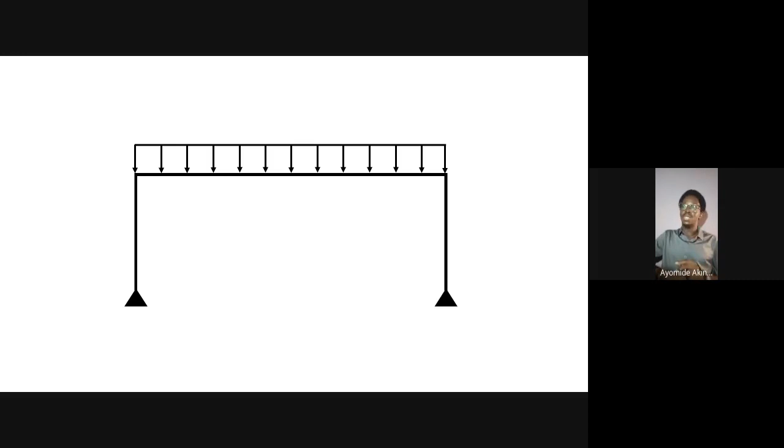All right, great. I love the honesty, right? So William said he doesn't know, and that's one of the important things about this meeting. We're breaking everything down, discretizing it, to very simple concepts. Now, all of these are textbook, right? When I mean textbook, it's easier said than done when we learn it, but applying it is a whole different game, and that's exactly what this program is about. Now, we're talking about buildings. Let's break it down, right?

Buildings are a combination of various things, right? Buildings are a combination of elements. We call them structural elements. And you can see in this diagram over here is what a lot of us actually refer to as skeleton. I don't know if many of you have heard this term before. So it's also referred to as what we call the structural frame. And the structural frame is the combination of different structural elements. Okay, and we're going to be breaking all of those down. So let's talk about these structural elements. Like I said before, if you have any questions, just let me know.

So what makes up a building structure? So this frame that we see inside here or in different buildings that we are in, what actually makes up the frame? So let's start with this. A lot of us right now are probably sitting down, standing if you are diligent. But we are probably sitting down in a building, right? A lot of us may be in a building. We may be on top of a floor, for instance, right? And that's actually part of the building, if I must say. We want to understand what the function of all of these elements are.

So let's start off with something simple. So what makes up a building structure? The first one I want to talk about now is the columns. So how many of you know what columns are? Let me see by hand again. You know what a column is, or rather, you've heard of the term. Okay, great.

So, columns in this case are vertical members through buildings, right? And we have basic classifications of columns. So for instance, we can have just decorative columns like you've seen in some of these Roman Empire prehistoric structures, right? Those very decorative columns, they just design them. Those serve as aesthetic architectural columns.

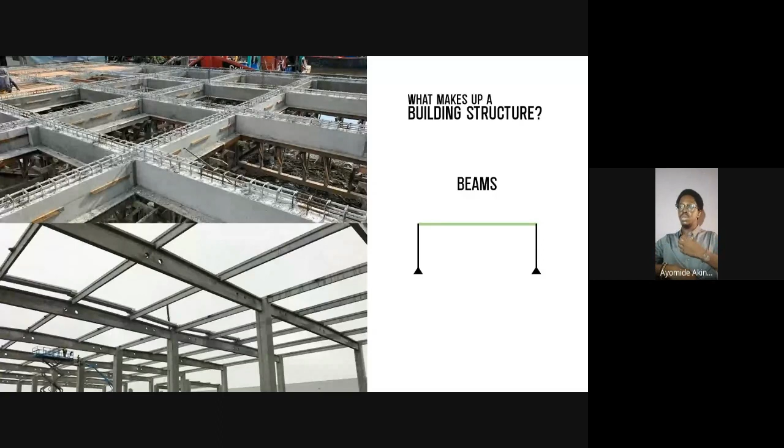The second element of the building I want to talk about now are beams. We refer to these sometimes as girders or joists, depending on the function of that particular element. So what exactly do beams do? Generally, they are referred to as horizontal structural members. Not necessarily always going to be horizontal, they could be inclined as well.

But what actually gives them the name beams is that the loads are directly imposed on them on this plane, right? So for instance, let's assume this is our beam. The loads are imposed on it in this particular direction. If the beam was inclined like this, as long as the loads are still imposed on it in this direction, it still functions as a beam. If we look at this as a member, many of us may be quick to think this is a column.

But the questions that we should be asking, for instance, is where exactly are the loads imposed on this particular structure? If they are imposed in this direction, for instance, it still functions as a beam. Now let me give a quick trivia. If, for instance, the loads are imposed on this particular element from the top, what does this make this element?

So let me just see by hands. Let me see if you can get that in the chat box. All right, so Ahmad Sabri said it functions as a column. Let me see if anybody else has any comments on that. All right, Felix said column, column. Well, great. You guys are doing great, right?

So also, depending on how that particular structural element is loaded, that's how you determine what it should be analyzed and designed as. And we'll get over to analysis and design shortly. Okay, so like I mentioned, beams are horizontal or inclined members as long as the loads are acting directly along the span. Now they can be used in foundations as well, grade beams, foundation beams, and they refer to those as elastic members.

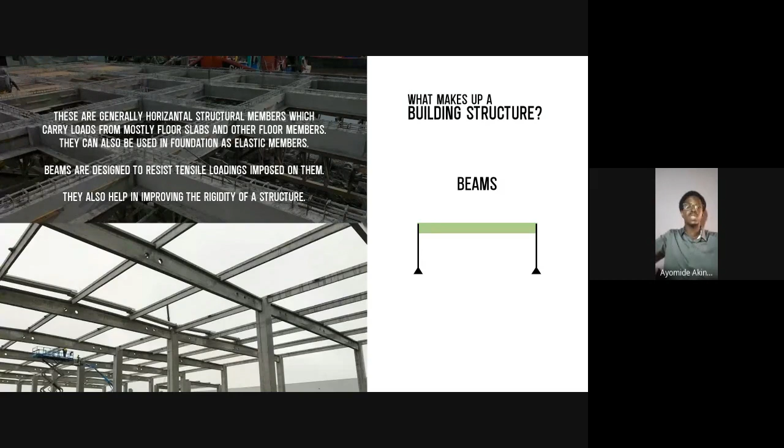Probably in your classrooms, you would have noticed a beam running through the middle of the classroom. Those beams are quite thick. The reason for that is that those beams are carrying large floor slabs, and the larger the floor slabs, the greater the loads that are going to be sent to those beams. Okay. Now we talked about slabs quite a lot. Now let's go ahead and talk about it in depth.

Floor slabs, right? So floor slabs are those panels or structural elements that we are basically always going to be interacting with on a day-to-day basis. Buildings are made up of floor slabs. Those are the actual main part of the building where we actually start to load it as human beings, or whatever the building is meant to be used for.

All right. Now, you see that they collect the majority of variable loads on the structure. So for instance, now I am sitting right here on a floor slab. If I move to the other side of the room, I've basically moved from that area and that particular region of that slab is no longer loaded, right? And that's what we call variable loads. They aren't permanent like our partition walls, for instance. So those are the block walls you see in your room, right? So that's what I mean by they carry a lot of variable loads, okay?

Now, just like beams as well, they are also designed to resist tensile loadings. So they feel most of their loadings at the bottom, for instance, right? But what distinguishes them from beams is that they have a larger area, right? And more or less, they are designed in two directions, unlike the beam where it's just designed in one direction.

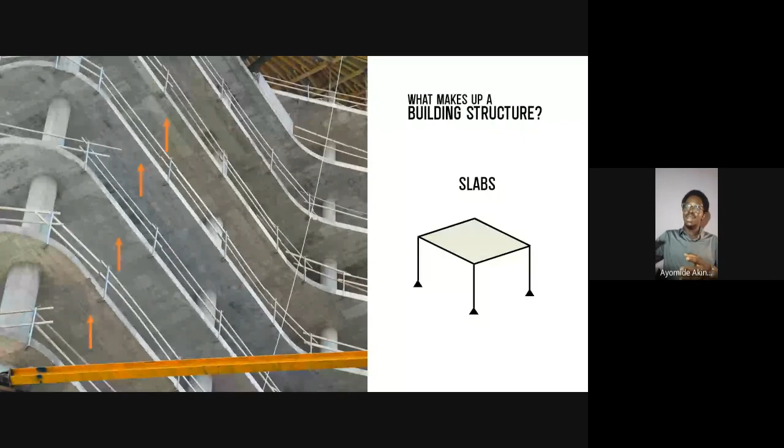So the kind of system where we have, let me move this to this next picture, the loads of the slabs going directly to the columns is what we call a flat slab system, right? I don't know if any of you have heard of solid slab systems, waffle slab systems, ribbed slab systems, flat slab systems, right? So those are what we call structural configurations. The cases where we use flat slabs is probably where we want to have larger spans or we don't want to have those suspended beams showing in the rooms, right?

So buildings could be designed to have the loads of the slab go directly to the columns. But one of the things that you notice ahead of time is that those columns are always going to have a larger cross-section area, right? And also you notice that in some cases where the slab spans are quite large, the thickness of the slabs increases.

All right, so I saw a beautiful question. I think I missed that, but let me go back to it. Amatabi said, could you explain the difference between the various types of slabs? Okay, great. So that's basically what I'm doing right now. So for flat slabs, the loads from the slab go directly to the columns and they have larger spans. One thing that you also notice about them is that they have a significantly larger thickness or structural depth.

For the solid slab systems, those types of slabs are carried by beams. So the loading from the slabs is connected to the beams, right? And then from the beams, those loads go directly to the columns. And that's one that we're actually quite familiar with. Probably you see that in your dorm room, for instance, or in smaller buildings like residential buildings, okay?

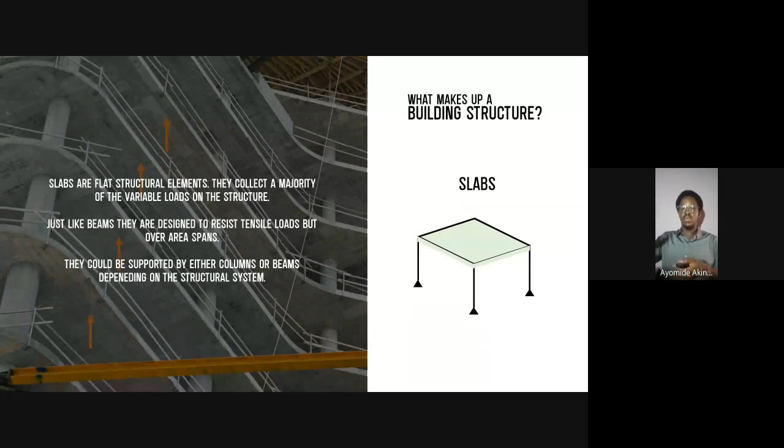So I put in an illustration, for instance, where the loading on the slab increases, right? And as a designer, you notice that particular slab is failing. What we as structural engineers tend to do is increase the thickness of the slab, right? To make it perform or function as exactly what it was loaded to do. Okay. Now, going on here, we now talk about walls.

All right, so let me stop here because these particular elements are not quite common. But how many of us are familiar with structural walls? Not your normal architectural walls, but how many of you have come across structural walls before? Okay, all right. So Duncan, okay, great. So Felix, all right, great. So you guys are familiar with structural walls.

So what distinguishes a structural wall, for instance, from a normal architectural wall? Okay, so structural walls are also panels just like slabs, but in this case, they actually do the same role as columns, right?

So let me see. I've got quite a lot of items on my table. Let me see if I can get a cleaner element I can use. All right, so I have my Bible over here, right? So let's assume this is a wall, right?

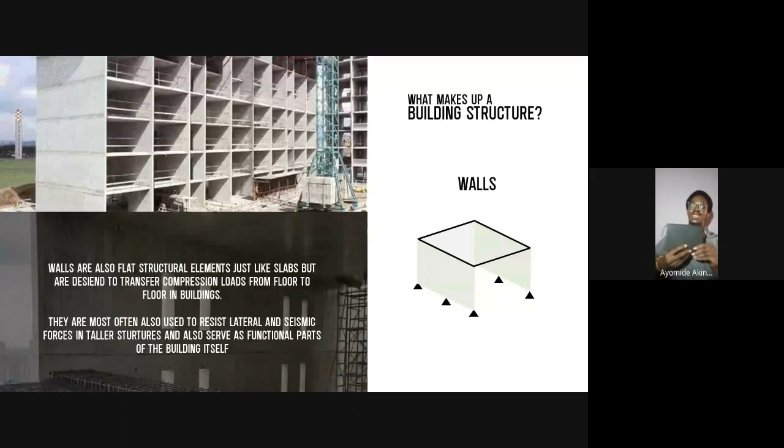Okay, great. So these walls tend to be structural. That means they actually carry loads. For you to determine a particular element is a structural element, it is carrying loads from the structure. In the case of walls, the loads are going directly to the top of the elements, just like beams. But what distinguishes it from beams is that beams are just suspended elements. Walls go down just like columns.

So those internal forces flow through the wall, and then they go straight down to the foundations, just like columns as well. So that is how you distinguish structural walls. Now, if the structural wall was a concrete element, you will notice that those walls are always going to be reinforced, right? They will have steel embedded inside them, just like your other concrete elements. I'll talk about those materials.

And also, for taller structures, we use structural walls to resist seismic and wind lateral loadings on buildings, right? So they have those functions as well to reduce lateral drift. If you notice in countries that have high risk of seismic activity, taller structures tend to be built with core walls or shear walls at the edges, right? Those help to reduce what we call lateral drifting, the building collapsing as it's shaking. Okay, so that is one of the functions as well.

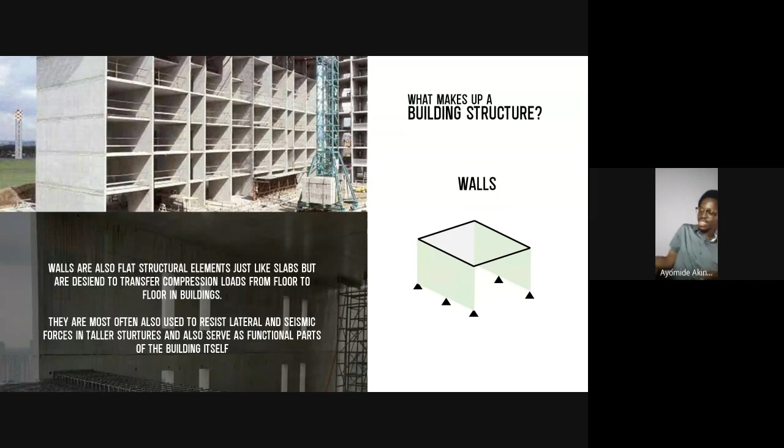Okay. All right. So yeah. All right. Great. Happy to explain that. All right, good. All right, great.

Foundations, right? So every single element that I talked about earlier on are what we call superstructural elements, apart from the ground beams that I made emphasis on earlier. So superstructural elements include columns. They could include your suspended beams. They could include your suspended floors as well. All of those loads are now transferred to the ground.

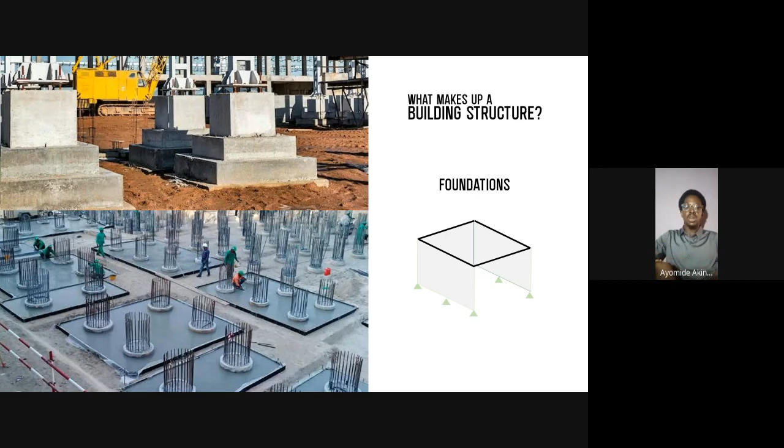So like I mentioned earlier, every single thing is subjected to the force of gravity. Everything must go down, okay? Now, foundations help to transfer those loadings coming from the superstructure all the way to the ground. And depending on some factors such as loadings, environmental factors, as well as the nature of the existing ground, it will determine the type of foundation that you use.

So let me do a quick stop and ask, how many of you are familiar with foundations? You can mention an example of a foundation type that you've probably seen before or you've learned about. So let me get that in the chat box. If you are familiar with a foundation type, let me see your responses in the chat box. Okay. All right, good. So I'll wait for that.

So like I mentioned, foundations are elements that actually take all the loadings from the superstructure, and they are basically referred to as what we call substructural elements. So we have various types of foundation. I haven't gotten any comments about foundation types, so probably because of time, let me move on. So we have different types of foundations. Okay, great. I think maybe that was a lag on my end.

All right, so we have shallow foundations. So that's the classification of foundations. Under shallow foundations, we could have, for instance, pad footings. We could have raft footings. Okay, so Victor said raft footings. Great. So if it's not a shallow foundation, it's most likely the other classification, which is a deep foundation. We could have piles, bored or drilled piles, which go straight down into the soil strata, into deeper depth.

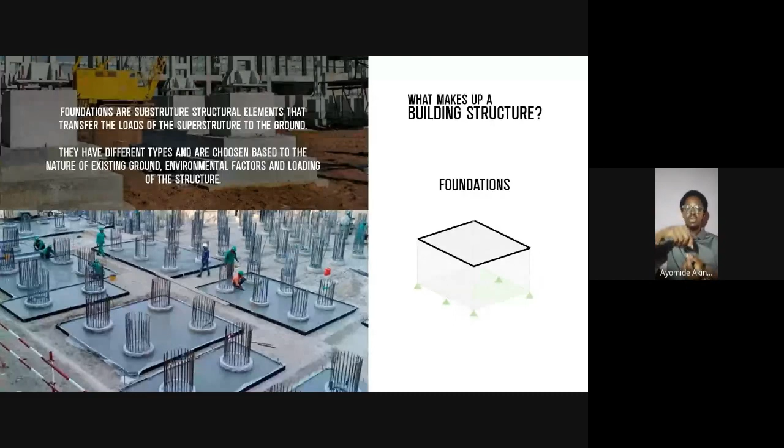Okay. All right. So that's basically how to also distinguish that. All right, so moving on, we also have what we call structural frames. So do not confuse it with structural configuration. Configuration means how the building, for instance, decomposes loads. So configurations such as solid slabs, where the slab loads go from the slab to the beams to the columns, or flat slabs in the case where it goes from the slabs directly to the columns.

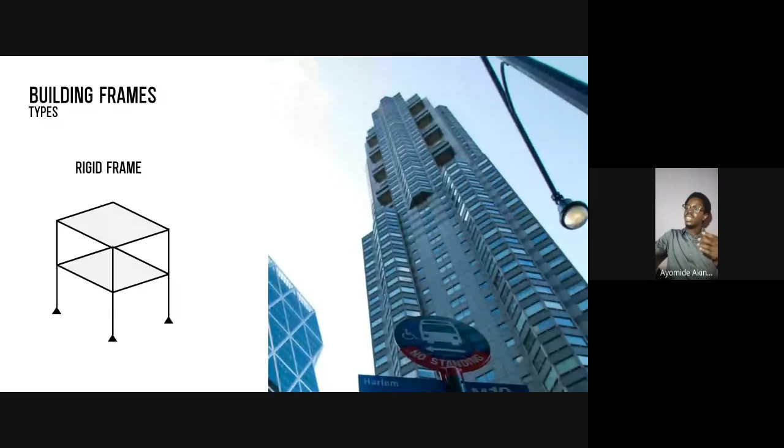But when we start to have what we call bracing, we now determine that that particular building frame has turned into what we call a braced frame structure, meaning that that particular system is going to be a lot stiffer. And I mentioned stiffness earlier on. So for instance, introducing beams at particular floors will make the building a lot stiffer in some areas.

Now, we don't necessarily always have to do that on the horizontal plane. You can also do that in the vertical or inclined plane as well, right? And that's one of the beauties of structural engineering, because by modeling and trying out some of these options, we can see what makes a building stand better depending on the type of loading that we are applying to it. Okay, great. So that's just a quick demonstration on building frames.

All right, good. So before I continue, if you do have any questions, do let me know as well. And just as we continue, I'm going to be talking about materials, right? So Kenyatta students, I want to ask, what is the most common building material in your country or in your particular area? Okay, I see a hand from Ahmad.

Yeah, that will be reinforced concrete. We haven't done much on structural timber. I heard it's happening in Uganda, but it's something that is yet to happen in Kenya. Mm, structural timber, that's sustainable, but mainly it's reinforced concrete, okay. And steel. All right, so reinforced concrete and structural steel.

Okay, great. So let me see, do I have any other hand as well? What is the common building material in your country? A lot of us are from Kenya as well. So let's see. I see from Muyazi, they said concrete as well. Okay, great. So materials used in construction, or rather, what are considered for design?

Someone didn't just wake up one morning and say, let's start building with concrete, right? There are actually some factors that go into the choice of building materials. So for instance, if you look into the western part of the world, so that's America, you will notice that there's a very common building material which is used for mostly residential buildings.

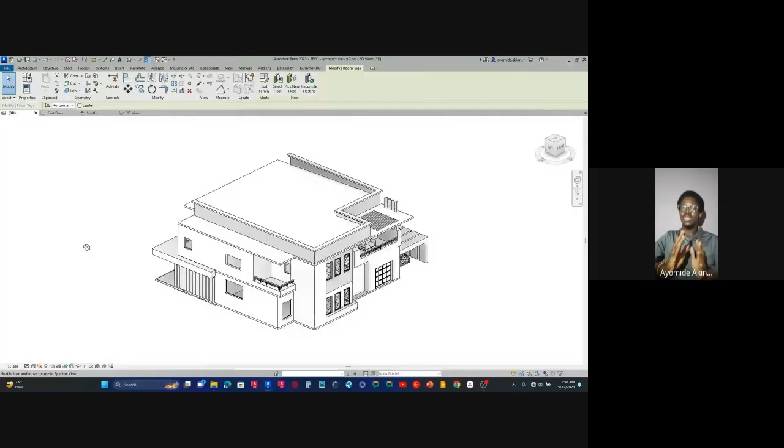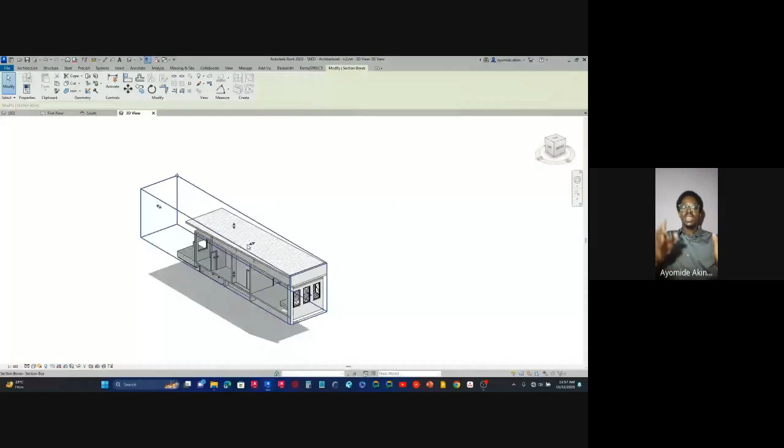All right, good. So now I've talked about some of the basics of structural design. If we have those foundational concepts, we know what type of material to use, we know the structural configuration, we know what the building elements are, such as the columns, the beams, the slabs, trusses, and all of that. How do we use all that information to design a building? I am the structural engineer and I have to determine where a structural element can be in a building. But I can't determine all these things without having what we call a referencing document.

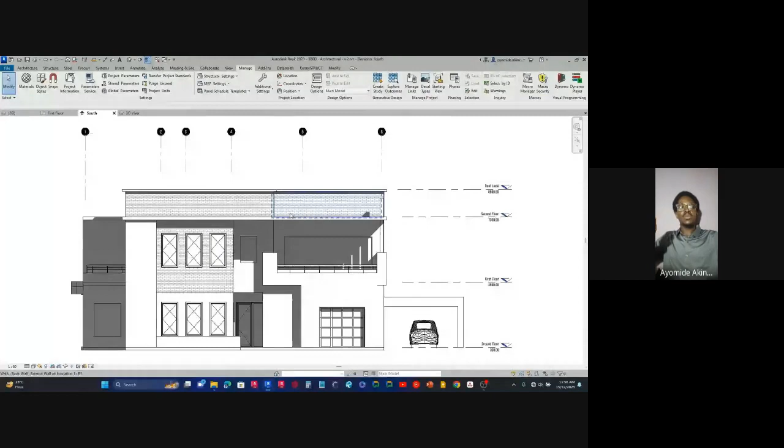So our first point of contact is to reach out to an architect. These are the professionals that are responsible for designing buildings in general. So we get consulted by an architect, or if you are working in a big firm, you collaborate with your architects and look at your design. Oh, this is really good. Always compliment the architects, by the way. That's good advice. And you look at the structure.

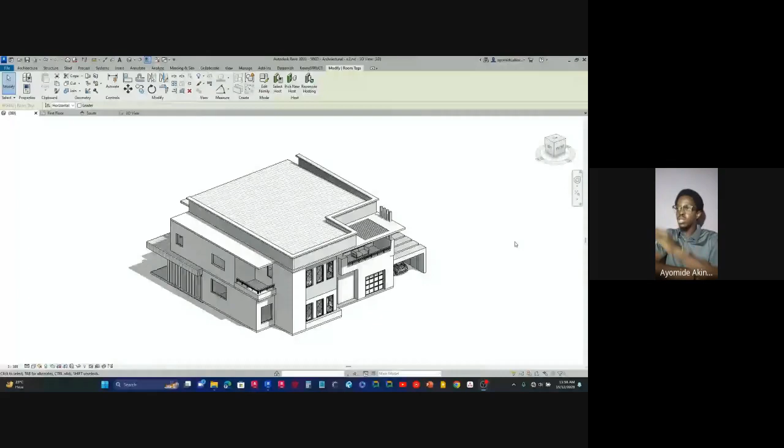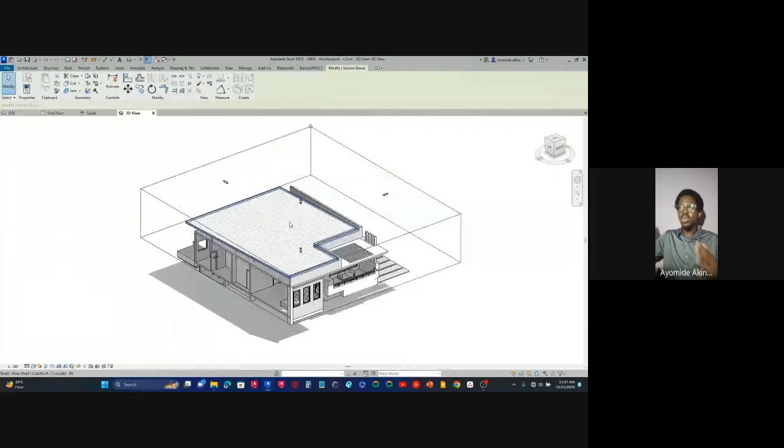Now, whatever is in the architectural drawing is not enough for the building to stand. We come in and say, okay, this is what we can do, this is where we can place structural elements. But this requires us to sit down and look through those documents. So if we're looking through 2D plans, printed drawings, PDFs, or BIM models, we want to look at areas that will be most exposed to loadings, areas that may prove problematic, areas that will call for concern, probably for rework or redesign. So we want to spend a lot of time looking through all these elements and making sure that this can actually work.

And you would have probably heard this before. I don't know how many of you have heard this in the industry; probably some of you have. The architect's dream is an engineer's nightmare.

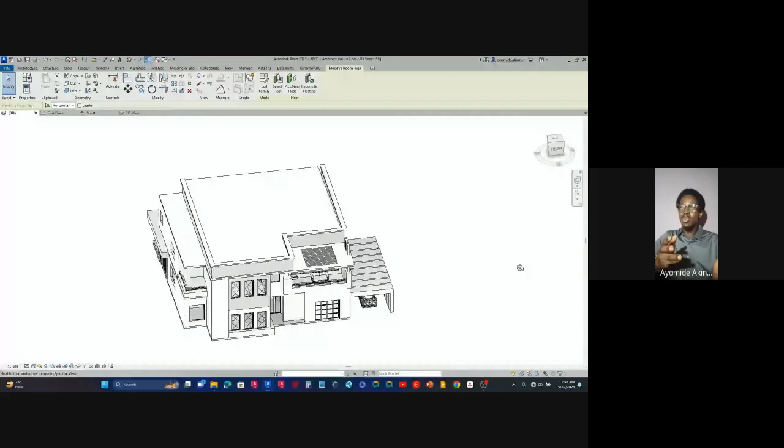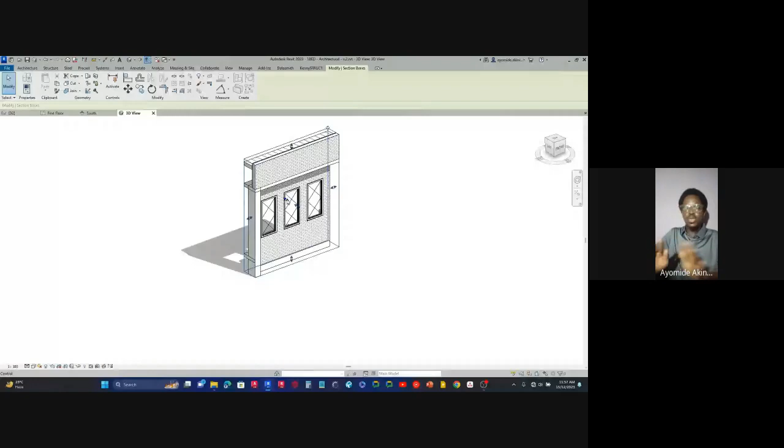Now it is our job to be challenged by the architect, his ideas, and then bring all of that together and say, okay, can we make this work? If it can't work, are there any other suggestions, right? So all of this, we take our time and look through the model. For instance, the arrangement of walls, the arrangement of floors, the levels, the height to height of floors. We look at all of this.

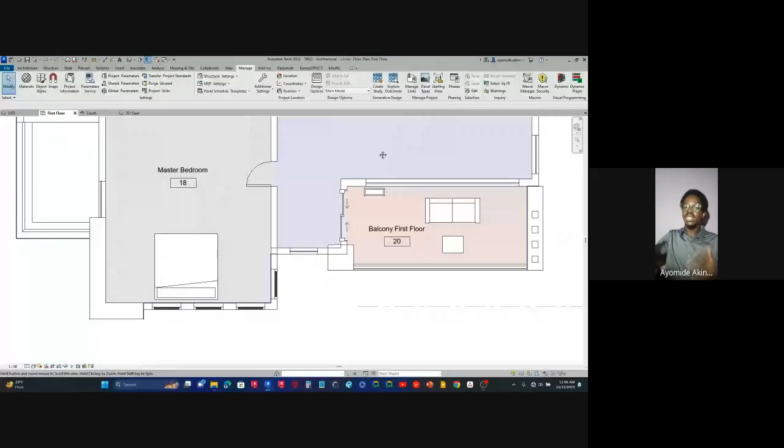I'm actually spending a lot of time there because as structural engineers, or probably project engineers as well, you really want to take a lot of time reviewing the architectural drawing before making decisions as you prepare for your structural design. Now, with that being said, we now go ahead and do what we call the arrangement of structural elements. As you can see in this visual demonstration, all of these elements have been hidden inside the building to make sure that they don't defeat the function of the structure.

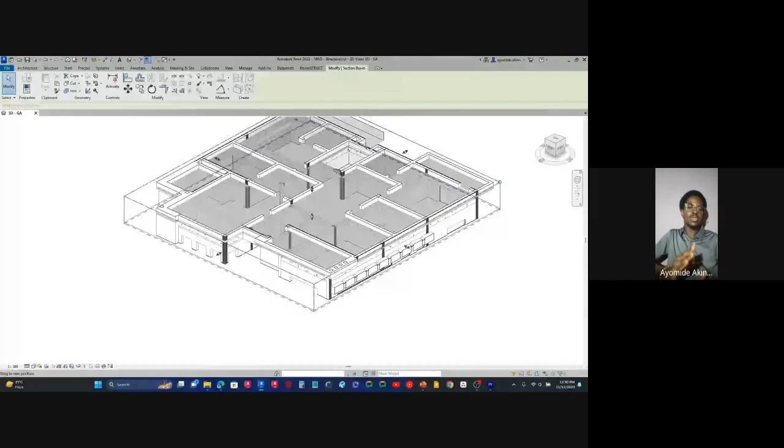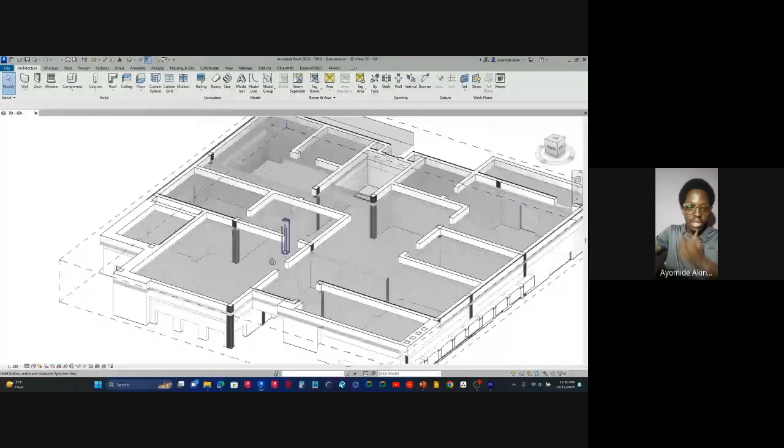Now, who can give me a reason why we have to hide these elements in the building? Probably by hands, or you could also mention in the chat box. So why do we hide our structural elements in the building? Let me just see if anybody gets that. All right, great. I see a comment from Jim. Jim is saying aesthetic, so probably referring to not defeating the aesthetic function of the building. So the beauty, right?

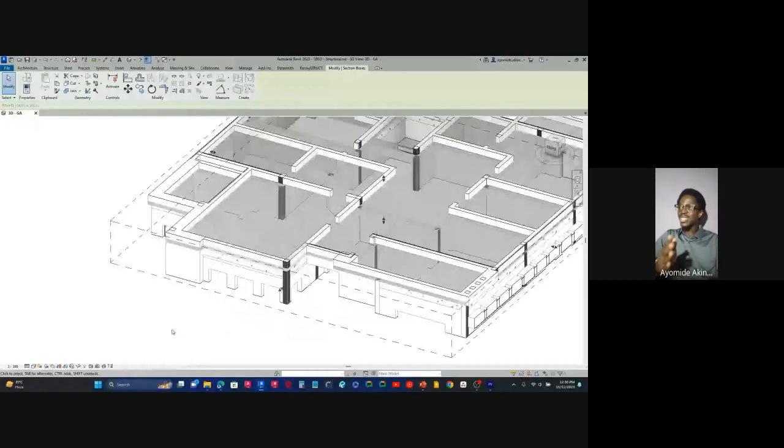Yeah, great, beauty. It won't be nice, for instance, if you are sitting in the living room watching TV and there's a column standing in front of you. Unless you are a hardcore structural engineer, you don't really want to see that, right? Like I mentioned earlier, the structural frame is the skeleton of the building. You don't walk on the road and expect people to see your skeleton. That's quite wrong and very disturbing, if I must say. We want to make sure that whatever is making the building stand is protected by the building core.

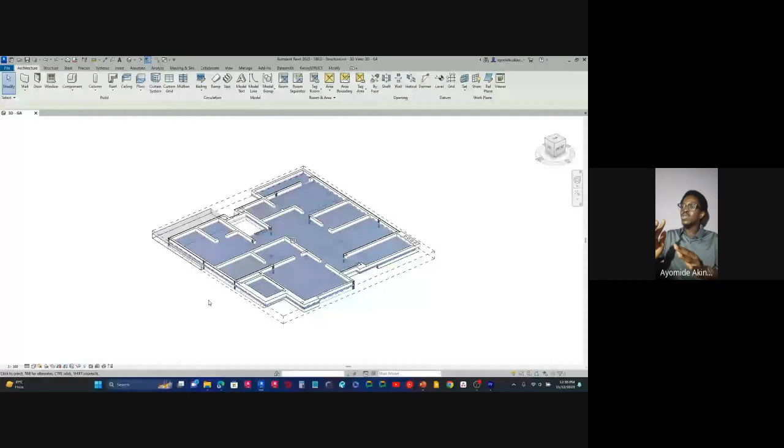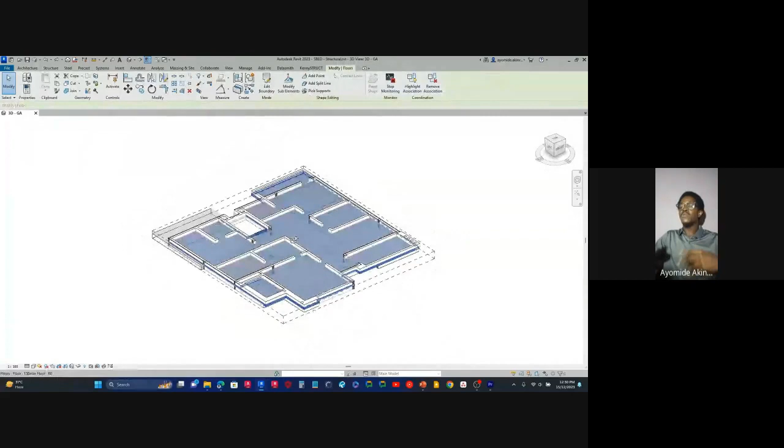So we now arrange these elements based on experience. And I mention experience, very important: based on experience, you arrange them in a way that you feel will work. Now, this is kind of an advice, especially for young designers. You don't necessarily always have to master the placement of elements. You place them in a way that you feel will work, and then you go over to analysis, which I'll talk about very shortly, and determine, okay, probably I can move this beam here, I can move this column here, and then see how it works.

All right, so now we've arranged the structural elements. We now go over here to analysis. Before I continue, let me ask: how many of you enjoyed structural analysis in school? I believe you should probably start structural analysis in your third year. All right. Okay, so if you do, it's probably the same thing as well.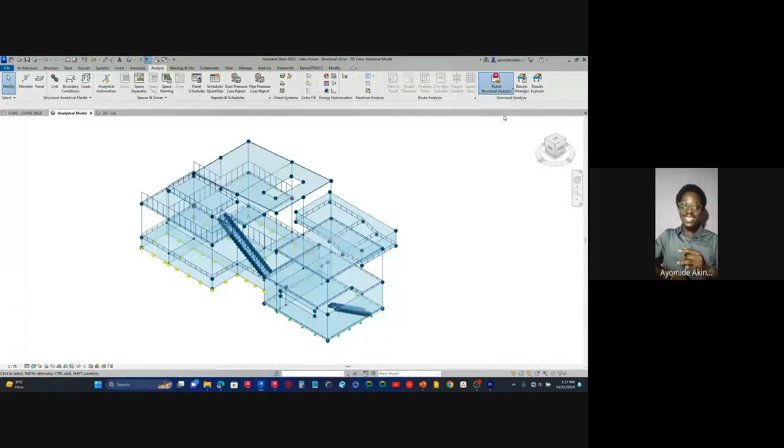All right. So Ahmad has a hand. Okay. All right. Yeah, just a comment. We're going to start structural analysis in our fourth year. So as with me, I'm going to start it in May, and if we have fourth years here, they've already done it. I'm going to do it in May. But this is very interesting so far. Okay, all right, great.

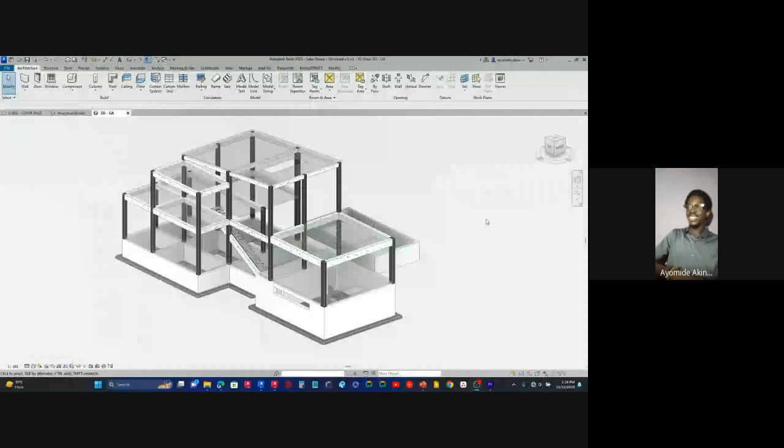All right, so structural analysis. Yeah, it's very important. And the reason why I mention this is that in most schools, I'm not sure if it's the same in Kenya, we tend to learn how to do structural analysis before design, which is actually the proper order of things. But, like for instance, you saw in the earlier presentation where you have those line diagrams. We are just seeing all of that and we don't know exactly what it means.

Okay, I think I have a hand from Ahmad.

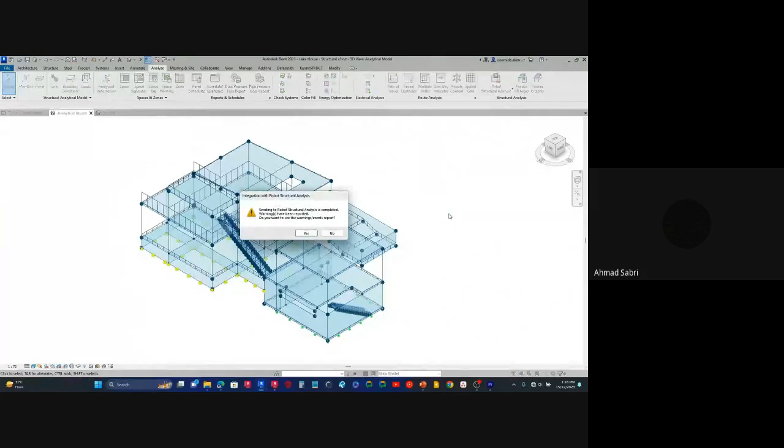Apologies, I think I meant to say we're going to do design in fourth year. And yeah, structural analysis, we've been doing it since second year. Okay, all right, in second year. Okay, great. Because I know it should be the first, order of things, right? So we see all these line diagrams, these confusing frames and all of that. And what exactly do they mean?

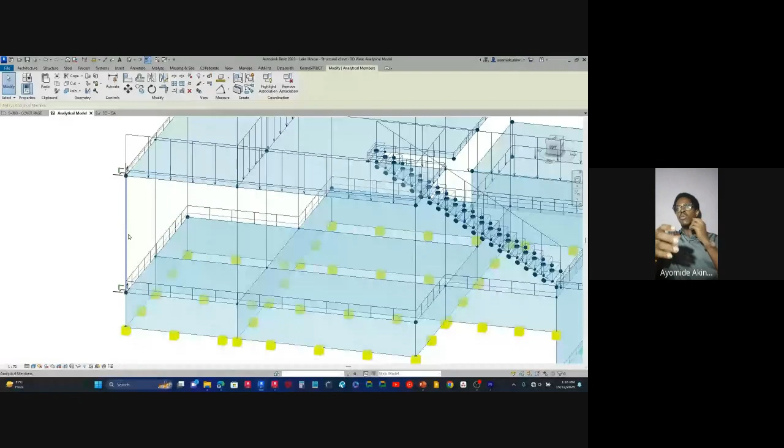Those are what we call representation of those structural elements. So like you saw earlier, for instance, a line connected to two triangles, right? These are what we call representation of your structural elements. And what we do is that we add loadings, like you saw those arrow diagrams earlier on in the presentation. We load them and then we analyze them to see how they react under those types of loads.

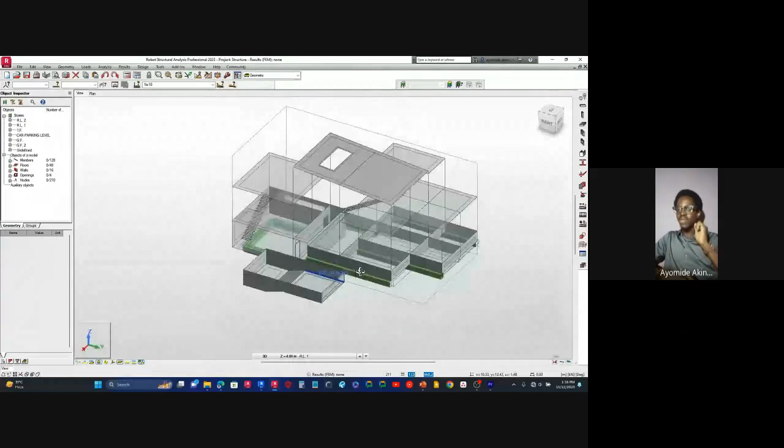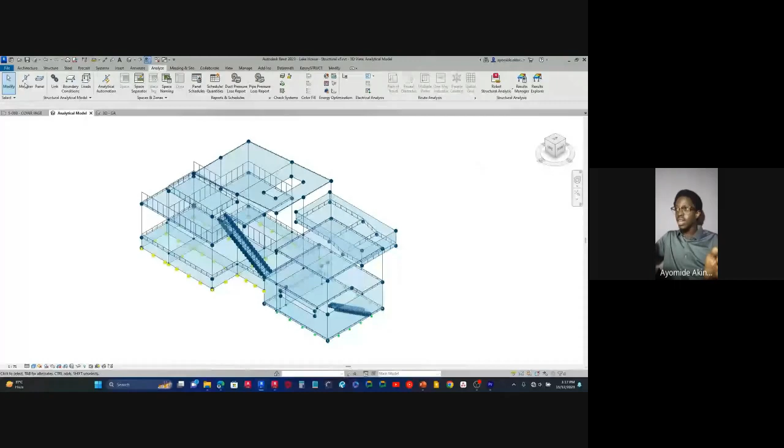Structural analysis is a very core part of structural engineering because it is where we get to determine, for instance, how a particular element should be designed, or what are the things that we need to look out for when we're designing the element. Is it going to be bending? Is it going to be torsion? Is it going to be shear? All of those things are very, very vital. And it's something that you would not necessarily always enjoy when you start, but once you see the practical aspects of it, it becomes the full beauty.

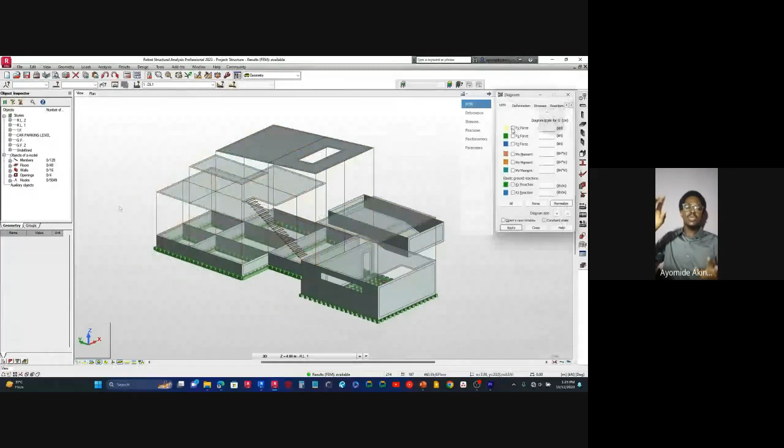Let me skip this here. This is probably what I can show you, for instance. You load the structure, you do your analysis using software or through manual design, and then you can look at your elements and see what forces they are subjected to based on how you loaded the structure. We can look at the bending, we can look at the axial forces. These are things that you can't see with your eyes, but these diagrams show you exactly what is happening in that element. And all of these values are what you consider when you start doing your design.

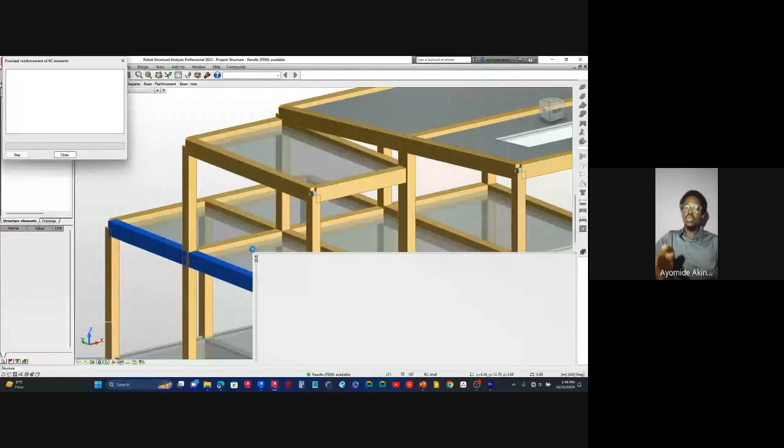So a good encouragement, trust me, structural analysis is very beautiful once you get the hang of it and you can apply it. Now, when you've analyzed your structure, it doesn't stop there. You're just beginning. You go ahead and prep for your design. You are considering those values as well as some other preliminary values. As a structural engineer you make a lot of assumptions, and this can be based on your experience, what you've been exposed to, or the preliminary data that has been given to you. So if you have a beam, you have some information about its cross-section area, you know what has been loaded, you know its values.

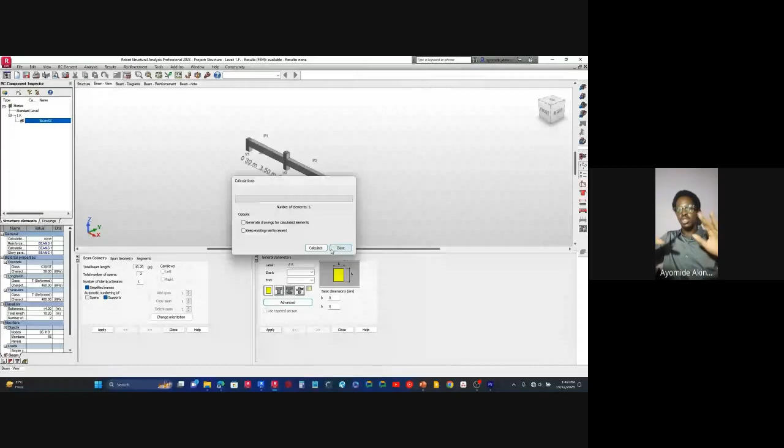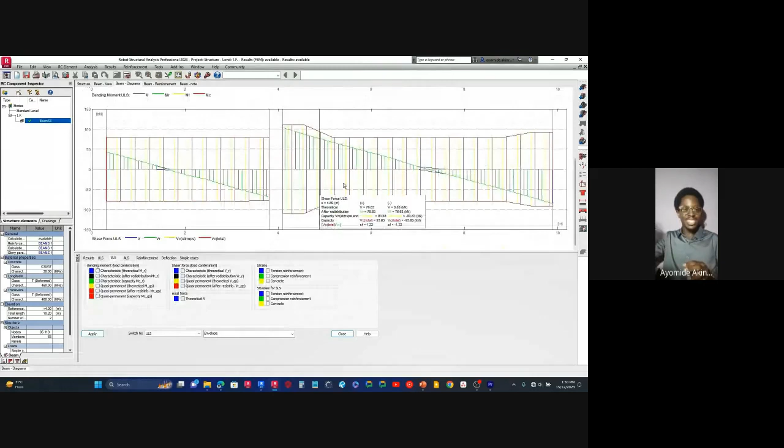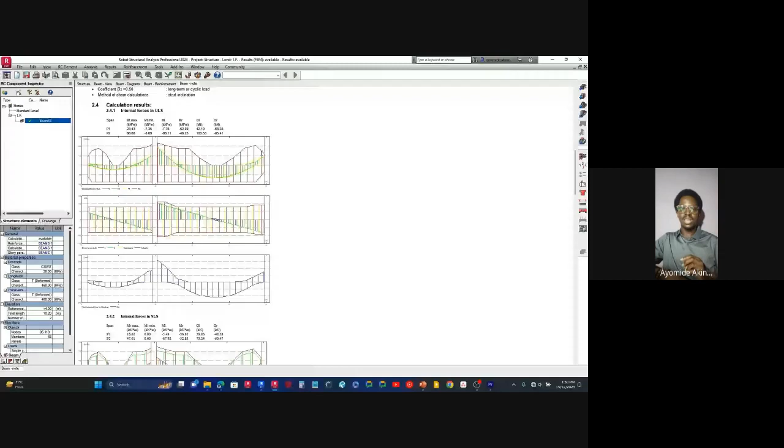Now, aside from all that geometric information and preliminary data, we have to choose a code. How many of you are familiar with design codes? Please don't pay attention to this slide for now, it's going to be on repeat. So how many of you are familiar with design codes? That's structural design, building design codes. Let me see hands. All right, so Felix has a hand. Okay, Duncan has a hand. Okay, great. Let me simplify it like this.

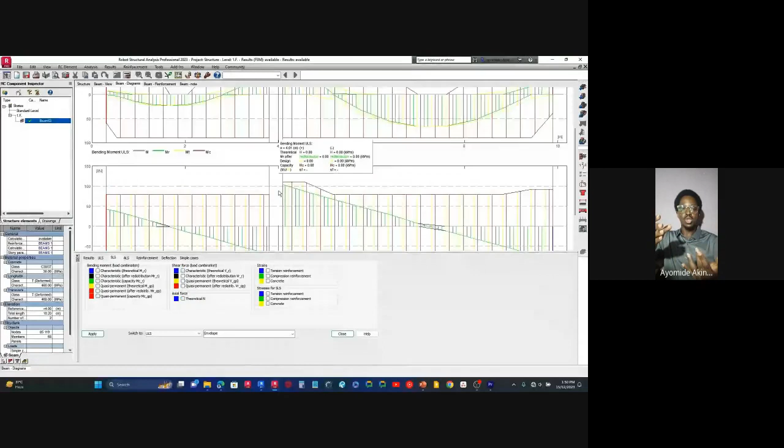We can't leave human beings to determine how structures should be designed, especially contractors. People will get away with a lot of things. If you get to a construction site as a project engineer, and the drawing says there should be three numbers of 16 members placed at the bottom of the beam, and another engineer walks in and says no, place two numbers of 16 members at the bottom of the beam, there's going to be quite a lot of confusion. What determines the number of bars in a reinforced concrete element is what we call a building design code. They have laid out instructions. I refer to it like a rule book.

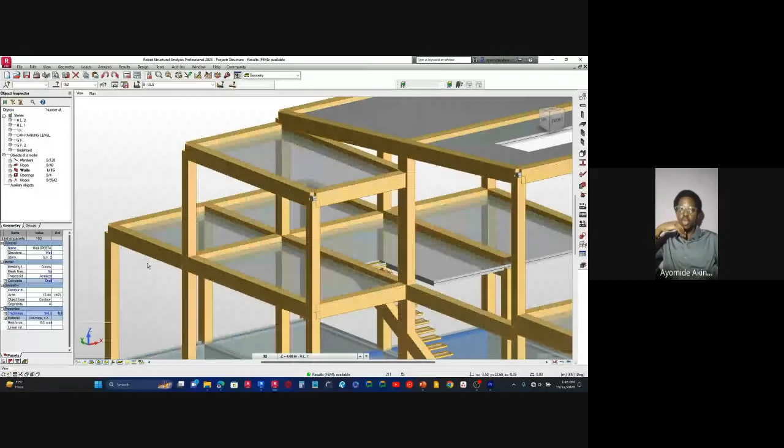A constitution for structural engineers to follow to determine how a particular element should be designed, right? So not everybody will just have their own idea on how an element should work. So all of these have been researched, and then they've been published for us structural engineers to use for the design of our elements. So we use all of that information to perform the design of some structural elements such as our beams, as you can see in this demonstration.

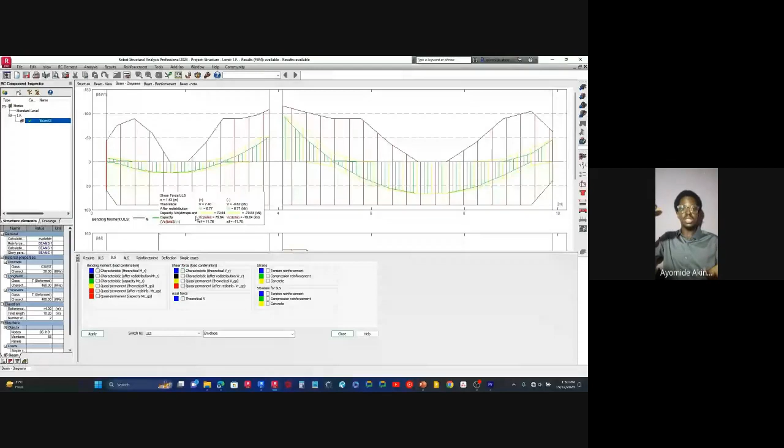And there's quite a lot of inputs that go into it. So for instance, you are going to specify the cover, you're going to specify the material, what type of concrete material you are going to use if you are using concrete; if you are using steel, what section shape you are going to be using; if you are using timber, what section you are going to be using; what is the grade of steel, what is the grade of timber. So all of this information, you put it and consider it in your design, and then you get your functional design.

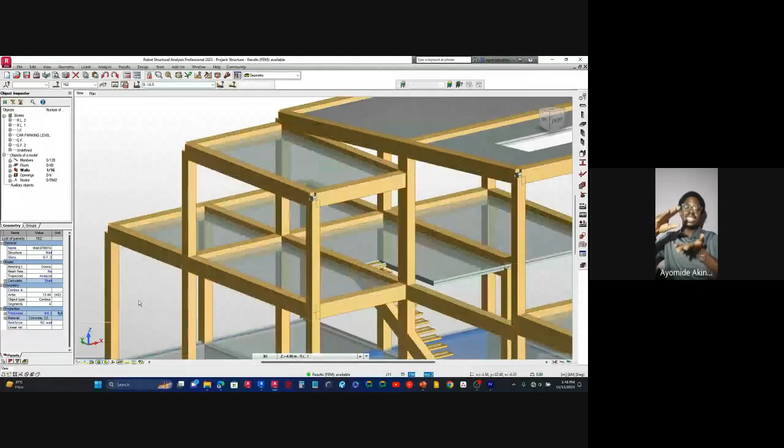Now, it's not every case where you're going to have a design that passes, right? We now go back to our foundational knowledge. If, for instance, I have a beam of a particular depth, let's say 300 mm, and it's failing, and let's say it's failing in tension, what can I do in that case to make that beam pass, just by using our general physics?

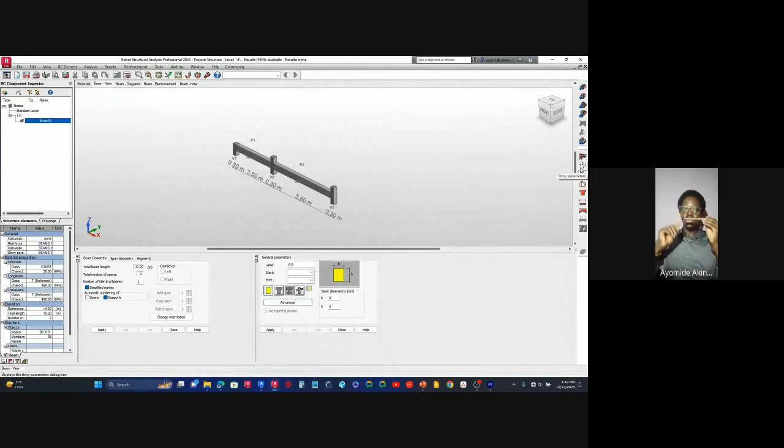If we have a beam which has a depth, so the depth is the thickness of the beam in this direction, of 300 mm, and it is failing based off of my design, what can I do to make that beam pass? So you can just guess if you don't know. Let me just see by hands. You just guess. All right.

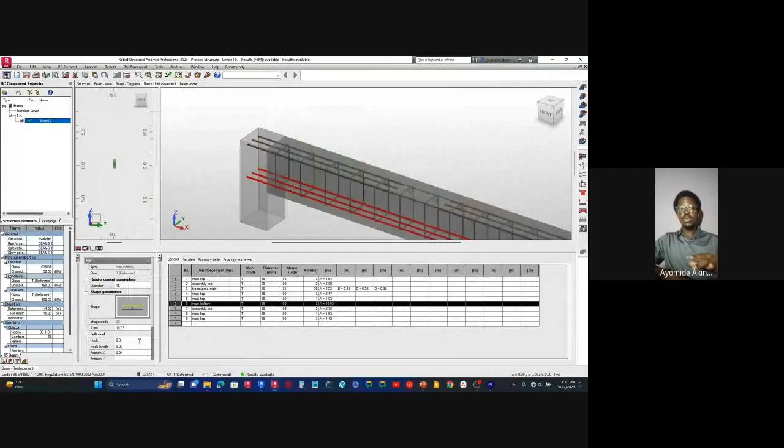So there's quite a lot of things that you can do to make a member pass in the design, and that's based on some of the things that we talked about earlier. I mentioned, for instance, concrete is poor in tension. Okay, I see a hand, I might say increase the depth. Great. So everybody is on the same page: by increasing the depth, we're increasing the strength of the concrete at the bottom. So we can do some of these things to structural elements.

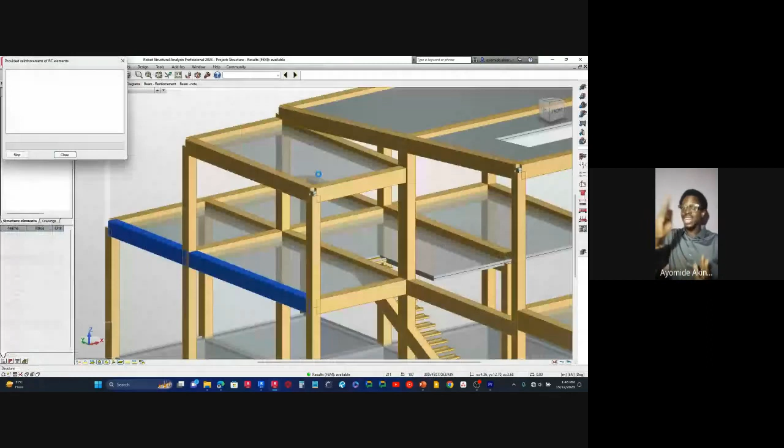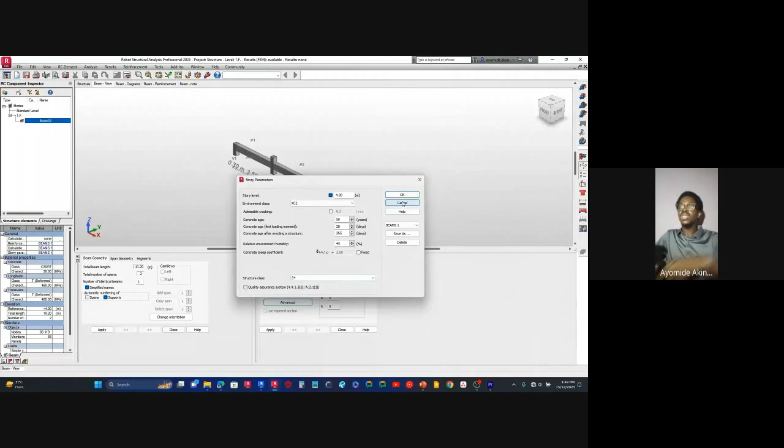Just like I mentioned on columns, if the loading becomes so much on the columns and the particular section is not passing, what we can do is increase the section of the column. If the column section was 200 by 200 and it's failing, we can increase the column section to, for instance, 300 by 300, and we check again and see if it passes. So the design stage is actually an iterative process, meaning that if it fails, we go back and redesign, changing some information, and then we check if it passes. So that's the design stage.

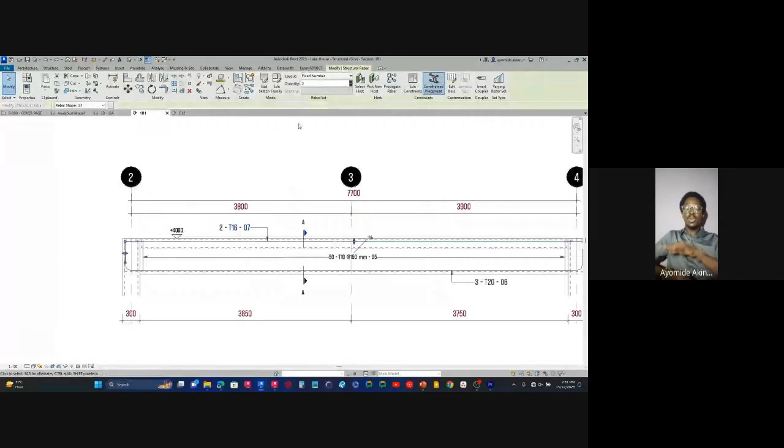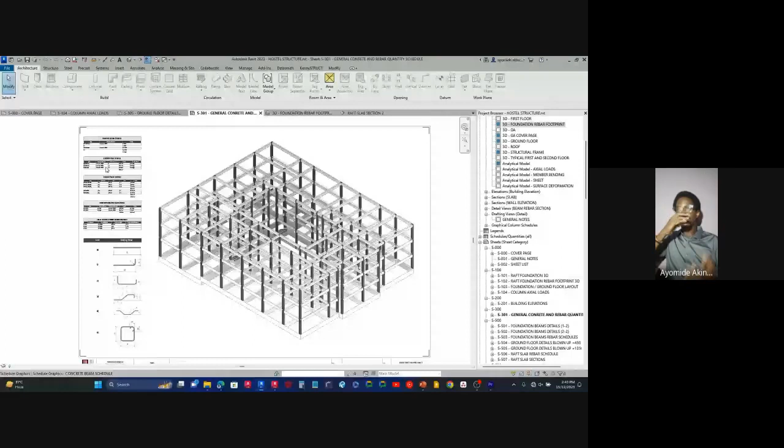Okay, great. Now we have designed, and probably this is where we think we can go and sit down and rest, right? But a design is not complete unless it can be documented and represented to whichever professional is going to be using it for construction. And this is actually a very good skill for us young engineers, especially before we come out of school, because it demonstrates our knowledge of how elements should actually be arranged or fabricated for construction. So we produce what we call detailed drawings.

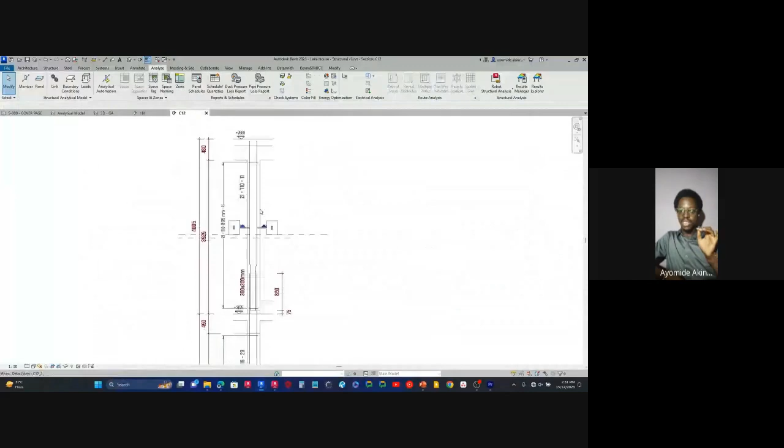I don't know if you guys are familiar with the term detailed drawings. So construction drawings, those are the drawings that you see on site that determine where this member should be placed. Okay, Philip said yes. Duncan said yes. Let me see if I have a no. Okay. All right, great. So structural drawing. Some of you have probably seen this in your assignments as well. All right, so Paul said no.

All right, great. So every single thing that we've done so far, from the analysis, design, determining the material, everything falls down to the structural drawings. This is what we send to people that may not necessarily be engineers.

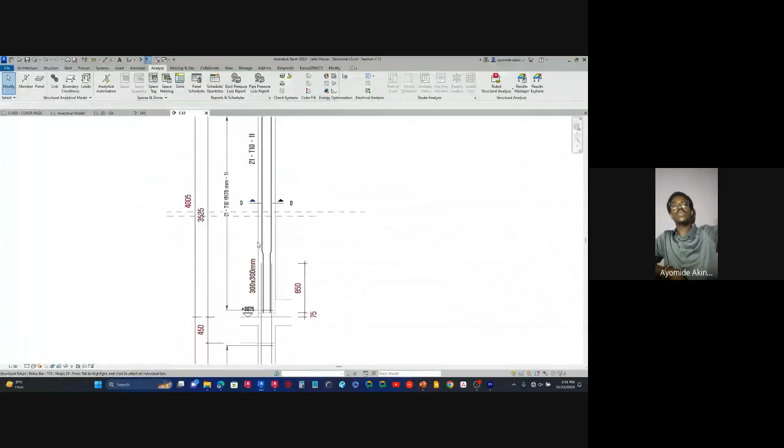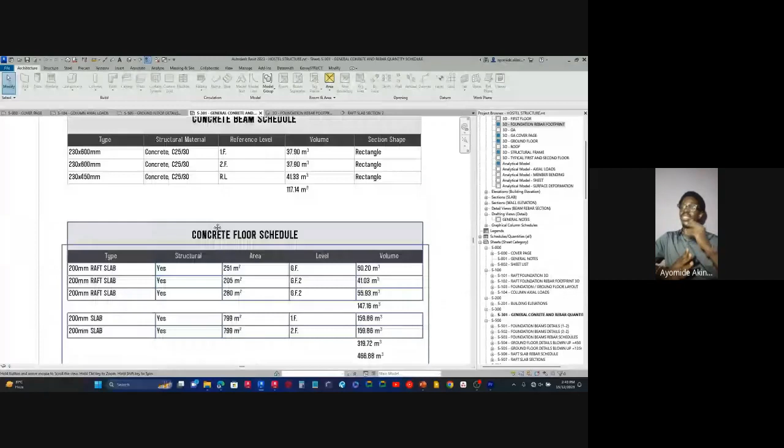Yes, and to actually go ahead and produce those things in real life, right? So it's more or less like our communication medium. You can't just walk to a construction site and say, okay, put this beam of this particular length here, provide this reinforcement or provide this steel section here, right? It's going to be like, what is your documentation? What is your proof that this will work, right? Everything needs to be documented in a proper way, so we understand how these elements work together.

Okay, all right, great. So documentations will be your structural drawings, and they are normally also coordinated with what we call the architectural drawings, right? So you would have seen, in some cases, the structural drawings not aligning with the architectural drawings. So that's why it's important that you always coordinate your drawings together.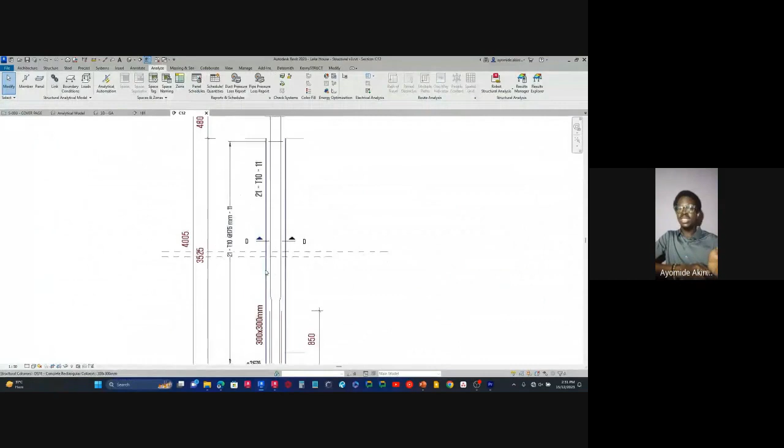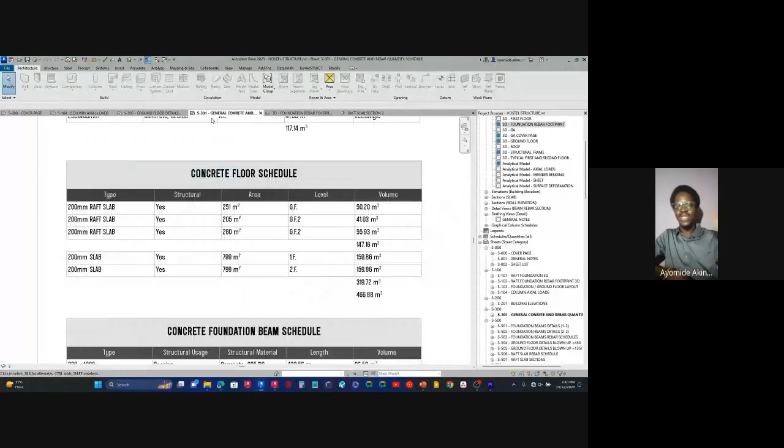Coordination just means that you are making sure that whatever is in the structural aligns with the architectural, meaning that I don't have that ugly column standing in front of me as I'm watching TV, right? We don't really love structures that much to have that kind of disparity in our building, right? So that's basically the whole process of structural design, which is the concept of this Making It Stand program that we held today.

Now, I would love to answer and address your questions. I really want to get questions, if you do have, and you could also start sending them in. But before we end the program and I hand it over to your president for more remarks, I would like for us to do a very short exercise, right? I would encourage everybody to participate. Like I said, I really love interactive engagement, and I would like to see how you think, as young engineers, on particular problems that we may face when we are doing structural designs.

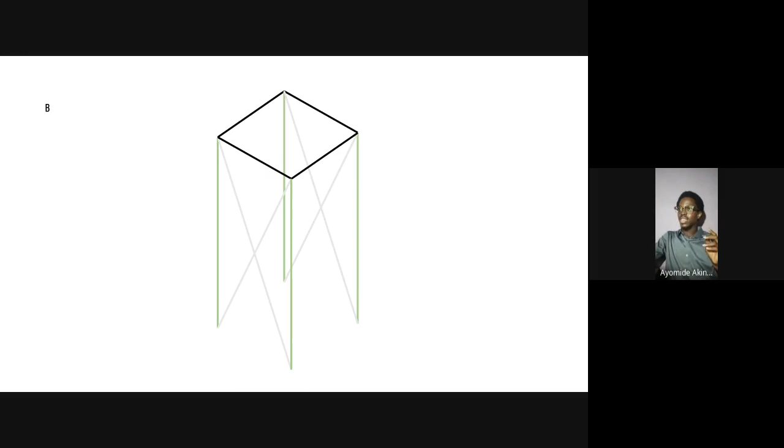This is option A. Option A is we increase the thickness of the column, so increasing the cross section. Option B, we're bracing it, so this is a brace system. And option C, we're introducing beams at an intermediate point of the columns. Okay, so let me take that again.

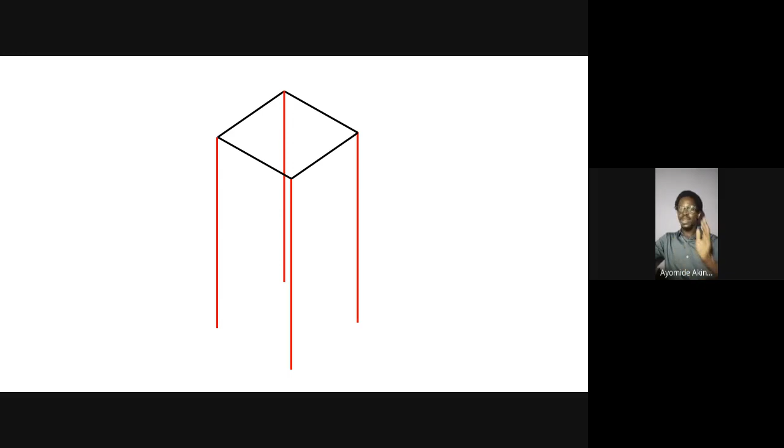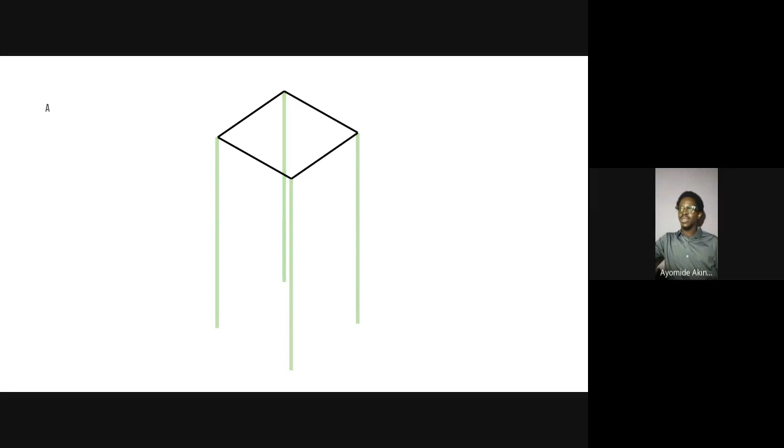All right. Okay, great. So I love the responses on this, right? All right, good. So if we have four columns like this, slender columns, I must say, and they are failing, what can we do to make these columns pass? Option A would be to increase the cross-section area. Option B will be to brace the columns. Option C will be to introduce beams at an intermediate spot in the columns.

So let me look at the responses, right? Okay, great. So I'm seeing B's. I'm seeing some A's. I'm seeing some C's as well. So I might say that B is more affordable, especially in high-rise buildings. Altering the columns will make it expensive. Great. That's a good response.

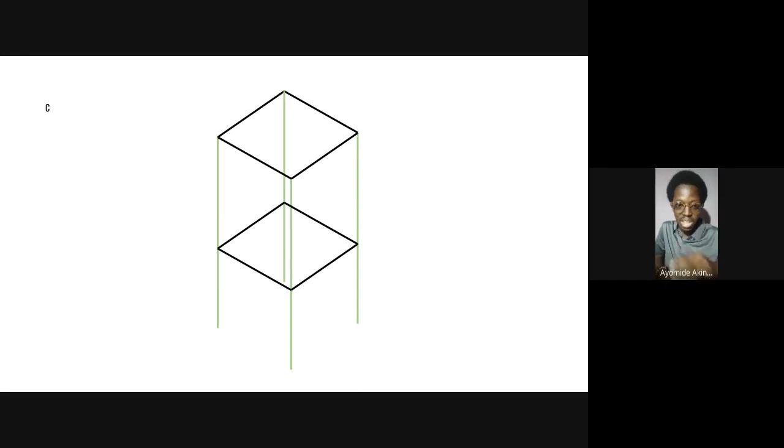Okay, Steven said B. B, C would have been nice, but it would be costly. Great. So you guys are considering all these factors together. And that is what we do as structural engineers. We consider some of these factors when we are fixing a problem. Now let's look at one more challenge and then we'll call it a meeting end, right?

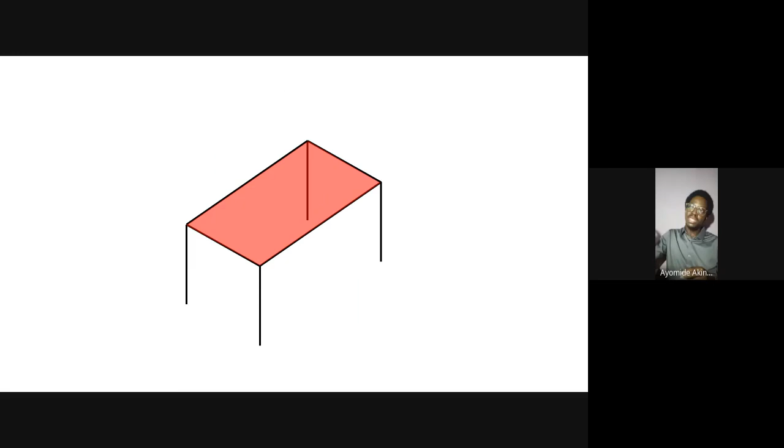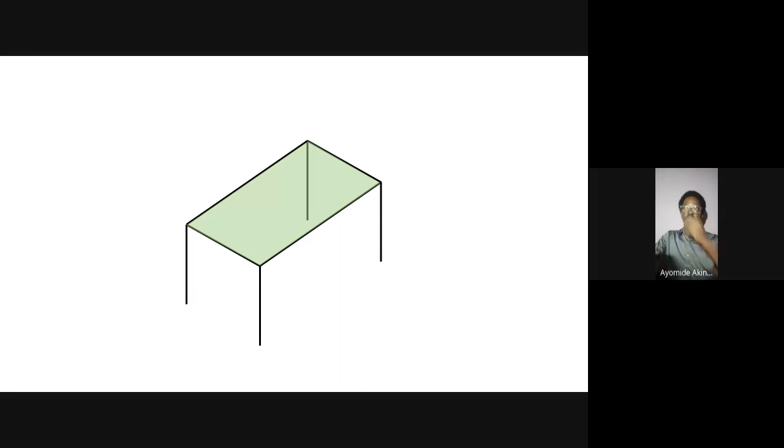So in this case here, we have a slab problem. This particular slab here is failing. So what can we do to make this slab pass? The first option is that I introduce a beam in between the slab span. That's option A. Option B is that I introduce smaller beams in between the slab spans. And option C would be to increase the depth of the slab, sorry. Okay, so let me take it again from the beginning.

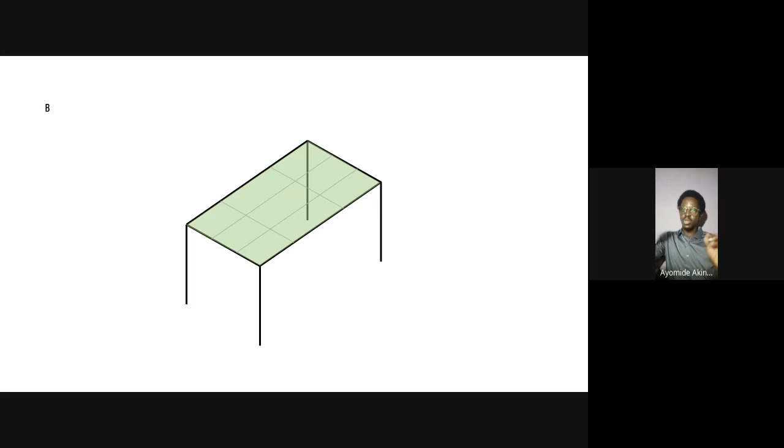All right, so we have a slab here which is failing. The first option will be to introduce a beam in between the slab. Option B would be to introduce smaller beam segments in between the slab area. And option C would be to increase the depth of the slab. All right, good. So let me see the responses on that. I'm seeing C's, I'm seeing A's.

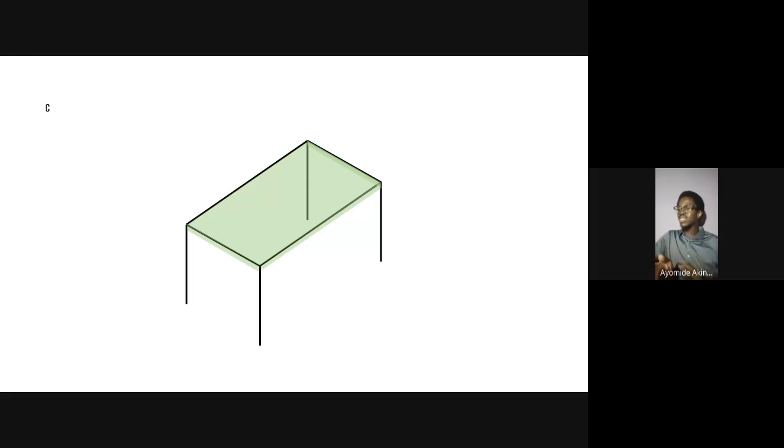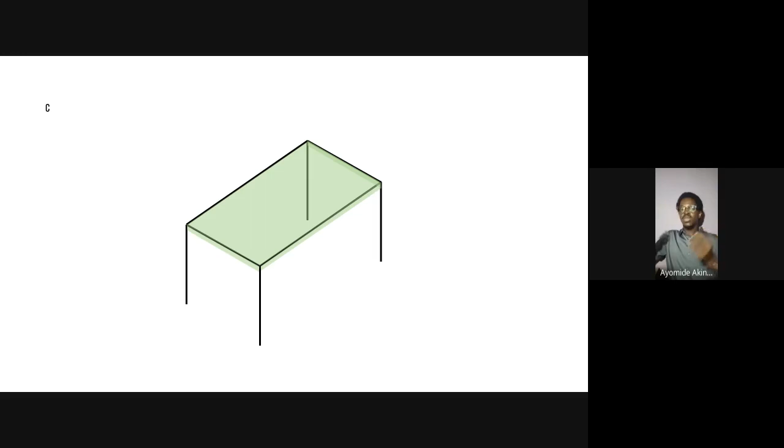So the beauty of this is that everybody has different answers, based on how they look at the problem. Like I mentioned earlier on, there are no right or wrong answers, because what we need to do as structural engineers is ask questions. We need to get information. For instance, what is the span of the slab? What is the material for the concrete, or the elements we're considering for the design? And all of this culminates in what we call design experience, to determine what particular solution works best.